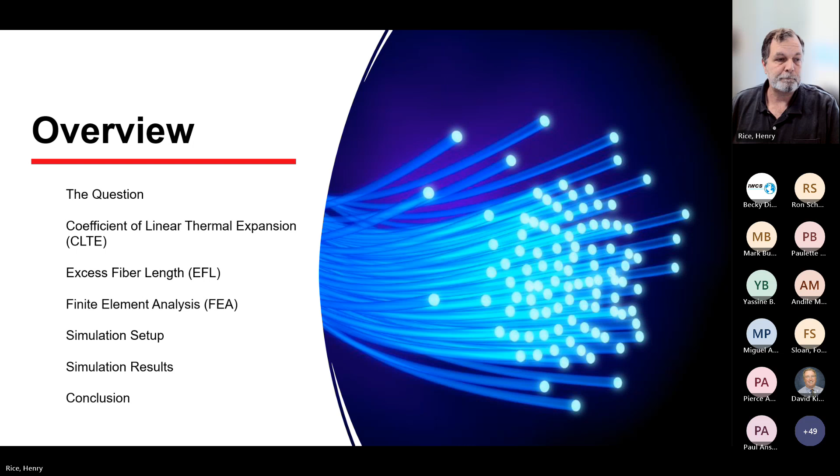The question that every engineering team has been asked since the beginning of time: how do we improve design cycle time and reduce cost? Like every great management team, our leadership asked us how we could reduce design cycle time and reduce the number of trials to just a few to reduce the design cost and intrusion into the production schedule.

And reducing intrusion into the production schedule is notably important as it affects product delivery and creates a myriad of scheduling and logistics issues. And our answer to the question was use simulation. We have played with simulation for fiber optic cable compression testing in the past, but had never used it for temperature cycling. For compression testing, it provided relative hoop strength based on material hardness, OD, and wall.

The other advantage of simulation is it allows us to look at novel materials and processes and allows us to run what-if scenarios and get outside of our comfort zone and beyond the proven methods that we've used through our life. Historically, temperature cycling has been one of the hardest tests to predict based on cable design and is a key component in qualification, especially in fiber optic cables.

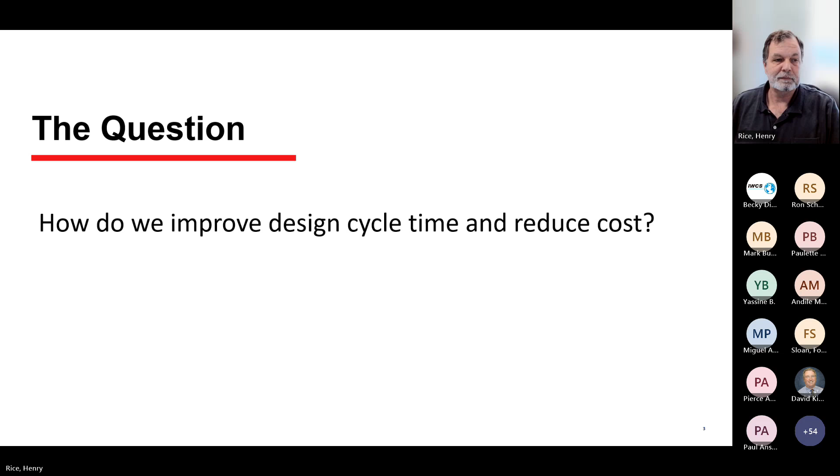The coefficient of linear thermal expansion, or CLTE, as it relates to fiber optic cable, is what causes the plastic jacket to shrink along its length at cold temperatures and expand at high temperatures. This shortening of the jacket causes the fibers inside to buckle like an accordion, which increases attenuation, which reduces the amount of light transmitted to the far end of the cable.

Some common CLTE applications around us include railroads, bridges, and vinyl siding. If railroad tracks are installed in cold temperatures and the rail sections are not gapped, when the temperature increases in the middle of summer, the rails can become cattywampus. Every bridge that you drove across this morning has an expansion joint to allow the sections to move with temperature. If your vinyl siding is nailed too tightly, it will buckle when it's hot and pop and crack when it's cold.

The SR-71 Blackbird is a less common CLTE application, but certainly more interesting. The plane leaks fuel while it's parked on the ground because the fuel tank panels do not expand and seal until the friction of the air heats up the panels at cruising speed.

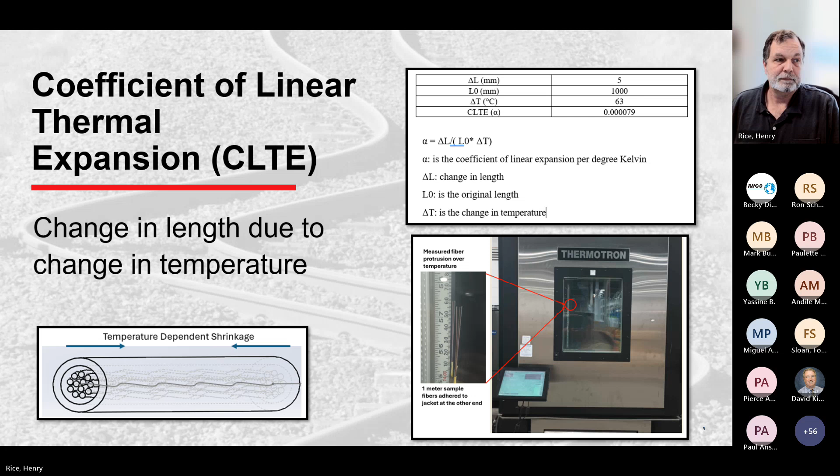Excess fiber length, as it relates to this temperature cycle simulation, is the initial state of the fibers in a loose configuration. It's the amount of optical fiber that exceeds the length of the buffer tube or subunit. It is typically expressed as a percentage of the jacket length and is unitless. It allows the fiber to be at minimal strain when the subunit is pulled or at elevated temperatures, but too much EFL at cold temperatures causes high attenuation due to the pressure on the fibers from the other fibers in the jacket shrinking from the CLTE.

EFL is initially established in the subunit as a balance of fiber tension and tube shrinkage during the extrusion of the subunits. And managing EFL is much more of a challenge with dry micro distribution style cables than with outside plant gel filled cables, as the gel kind of cushions the fibers, which creates much less attenuation. Also, it is not the same as helical excess fiber length, or the helix factor, which is the fiber being longer than the jacket due to the helical stranding of the subunits.

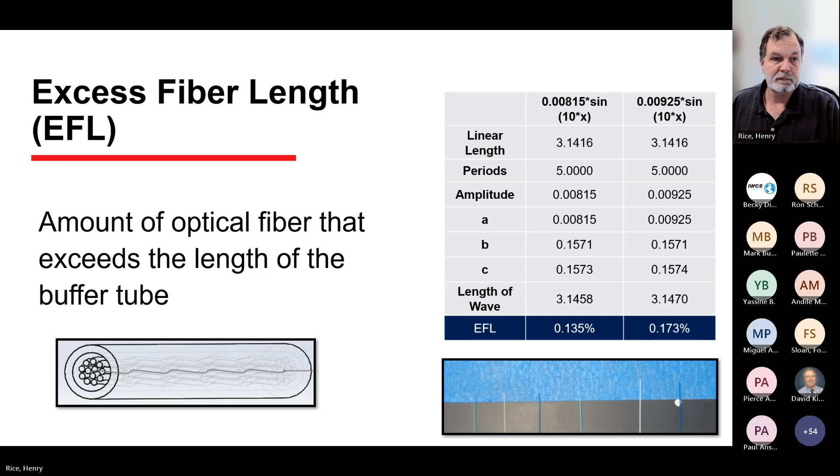Finite element analysis predicts the behavior of an object under stress by breaking it down into smaller elements and then solves using differential equations. We're not going to go too deep with FEA here, as it is a whole discipline in itself. It's often used for structural analysis to reduce design and test costs. It is used to determine the direction of a change for a design or for comparing designs rather than exact parameters due to the potential inaccuracies of a simulation.

We are using FEA in SolidWorks simulation to compare our temperature cycle attenuation results from samples with different starting EFLs. We are comparing the max fiber strain values caused by the CLTE at low temperature and correlating the max strain values to attenuation.

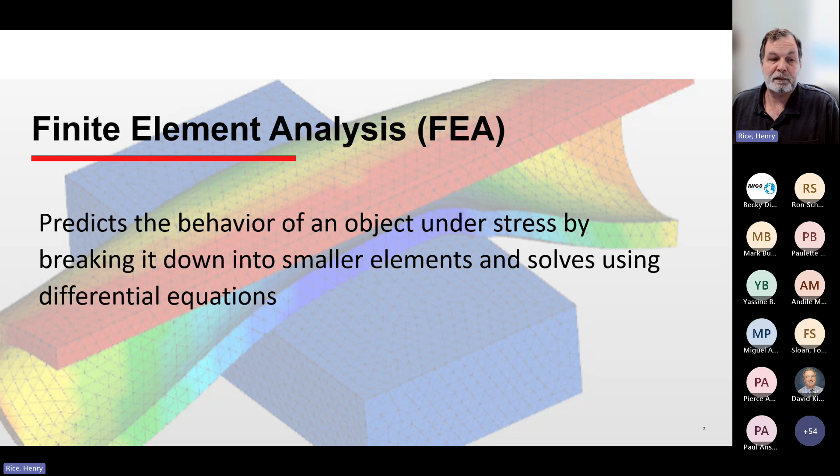The simulation was set up to represent a short section of cable in the middle of a reel where the fiber is constrained in the jacket. The model is a 2.3 millimeter subunit with 12 fibers, no aramid, dry tube, no gel. The end faces were fixed on one end with a rigid connector between the jacket and the fibers on the other end. No penetration contact was applied between the fibers and the jacket, and a temperature load of -40°C was applied to all exposed faces.

The max mesh element size was 0.0066 inches. The smaller the mesh size that you use, the longer that it takes to run, but the more accurate results that you get as it takes smaller components when it's calculating the FEA.

The fibers follow the equation-driven line provided by the EFL. You can note in the picture that the fibers are parallel. We tried to randomize the fiber path, but we could not overcome the interference issues and set them in a path where they didn't initially interfere with each other. The setup was tough. Finding the right combination of connections, contact sets, and fixtures seemed like it was never going to end.

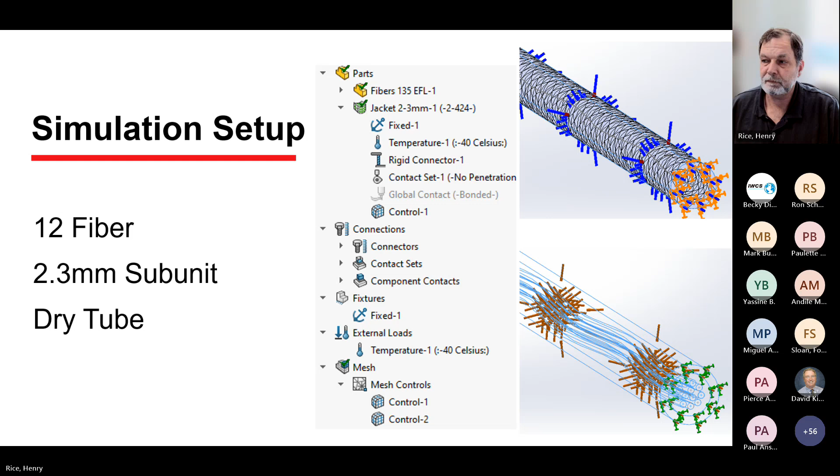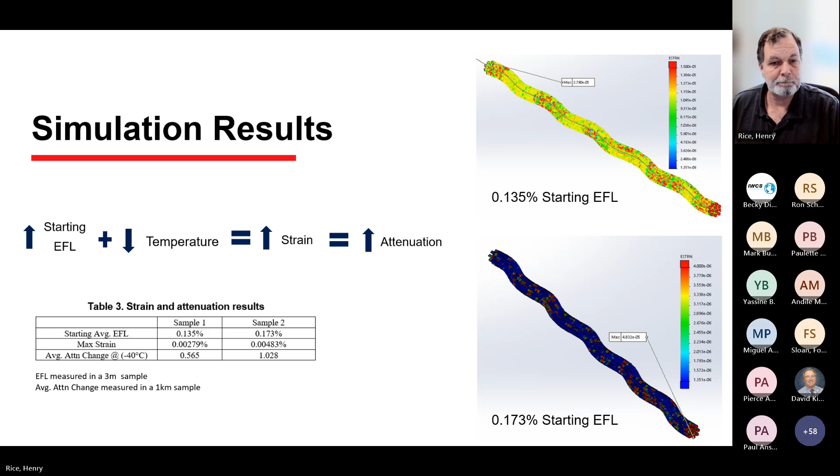And that brings us to our conclusion. The key to reducing trials from many, many iterations down to a few is simulation. And we've also concluded that too much EFL negatively impacts attenuation at low temperatures. In addition, too little EFL is a concern for tensile and high temperature during installation, also contributing to attenuation and strain concerns. Balancing EFL for low temperature and EFL for tensile high temperature is the next step to finalize the ideal design.

Further validation to empirical test results is certainly necessary. This is kind of our starting point. We feel that the model is at a place where we can start building out the data sets with other materials and other temperatures, other construction sizes, and so forth. And although the model isn't perfect, we can still continue to move forward with it.

The other things that we're looking at are other materials, other sizes, and one of the things that I most want to get out of this is the correlation to multimode fiber, which historically is much more sensitive to temperature cycling than the single mode fiber that we started this process with.

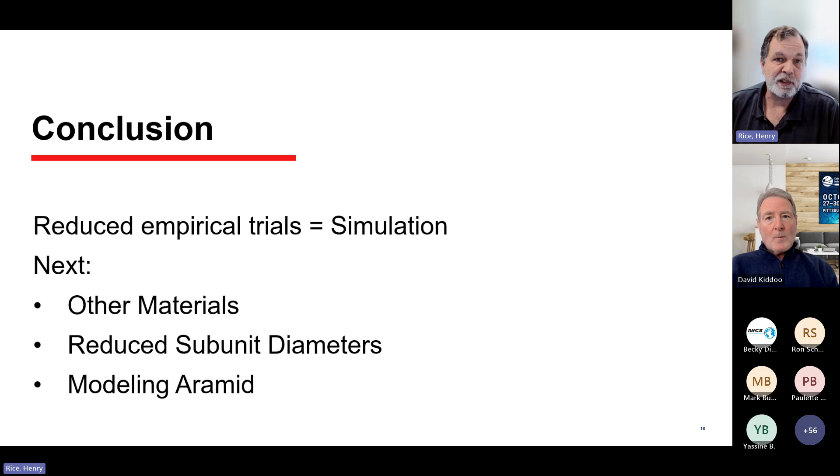We're trying to get it as solid as we can with a single subunit, and then when that gets mastered, we'll go into stranded tubes and stuff.